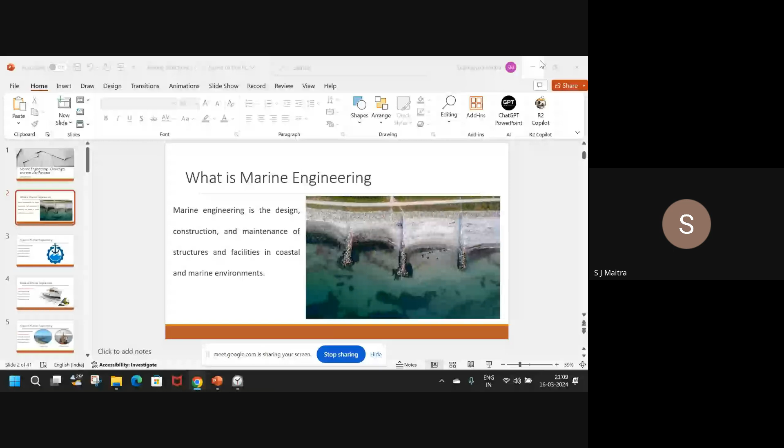Can you make it full screen, Maitra? It is at full screen right now. No, we are seeing it and it is not in slideshow mode. It is in slideshow right now for me. Can you please close it and reopen? Yeah, fine. Just a minute. Is it better now? Perfect. Please proceed. Okay, fine. So I'll start from the beginning.

So the topic of today's discussion is going to be marine engineering challenges and the way forward. I have kept it as introductory as possible. I am told that most of you are not from a marine background, so whatever I'm going to say is going to be very new to you. So we will go to the challenges and way forward, but I have spent a lot of time crafting a PPT that will help you understand and give an introduction to marine engineering as a whole.

Okay. So first of all, let us begin with what is marine engineering. Marine, as the name suggests, is anything related to water. Water, sea, oceans form about 75% of Earth's surface, right? And we have a lot of cargo movement that happens in the oceans and the seas. So the primary objective of marine engineering, be it 2000 years back or 4000 years back, was that cargo had to move from point A to point B.

And for that movement, all the basic infrastructure, be it roads, ports, ships, or coastal structures, had to be made for movement of cargo. So essentially, marine engineering is the design, construction, and maintenance of structures in coastal and marine environments. Whatever the structure, if you are designing, constructing, or maintaining it, there are certain codal provisions and aspects you have to keep in mind, and that entire scope is under marine engineering.

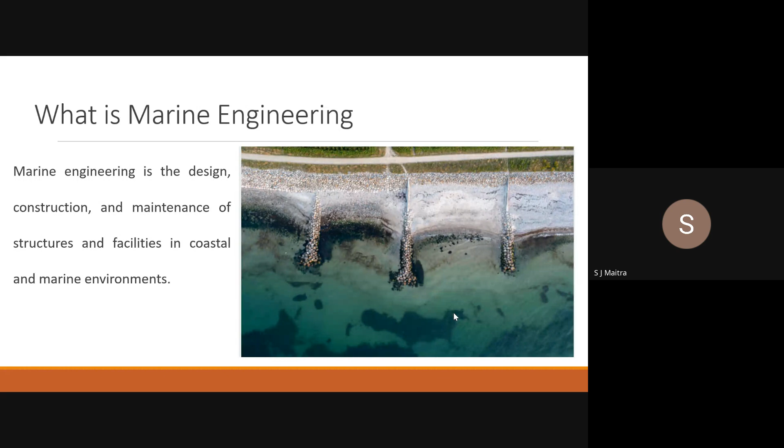All right. So let's move on to the next one. So what is the scope of marine engineering? Marine engineering has many parts. Okay, I have just tried to narrow it down as much as possible.

2000 years back, we were only moving cargo from point A to point B. But in 2024, we have a lot of technologies now. We have come up with many opportunities, many things. So these are the fundamental 5 pillars that marine engineering encompasses, right?

The first is naval architecture and ship design. So essentially, any ship that is made or any ship that is moving, however big it is, however complicated it is, however small and simple it is, needs to come out of a design sheet. Just like how 2D and 3D drawings are made, similarly, for every ship, you will make a design. Okay, so that is your naval architecture and ship design.

Second part is marine structures design. Third is dredging and harbor works. Fourth is marine power generation. Fifth is ship and cargo movement.

Okay. So I had started explaining naval architecture and ship design. As I said, it can be as complicated as an aircraft carrier or as simple as a 1000-ton barge. Every ship will have plan, section, elevation drawings, just like we have in a building or in a bridge, right? So this entire discipline is under naval architecture and ship design.

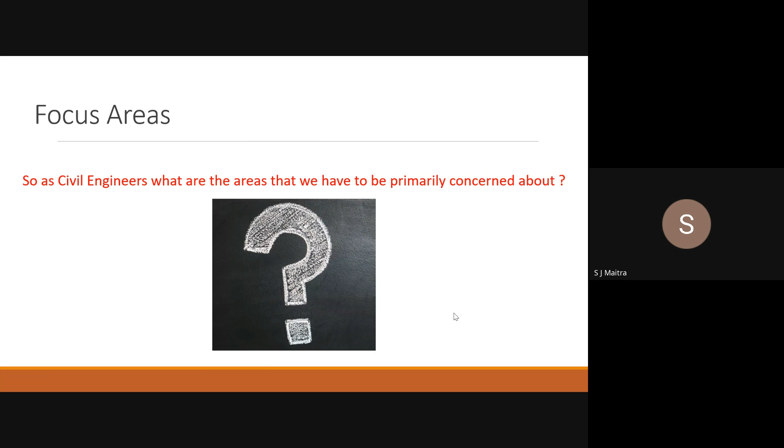Yes, correct. So, okay, now I'll be just moving on. May I know your name, please? Who said the last one? Sir, Govind. Okay, hi Govind. Govind, you're absolutely right about it. Marine structure design is one of the biggest focus areas for civil engineers. Now I'll come into the actual focus areas according to me. So first, as Govind said, marine structure design.

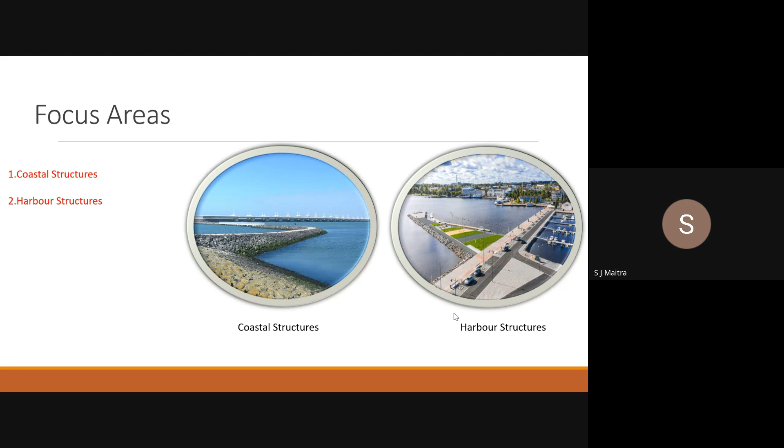If you go back to the slide, you will see marine structure design had 2 parts. One is coastal. Second one was offshore structures. Now for us, as civil engineers, coastal structures are the most important part. They are the bread and butter of every marine civil engineer, right? That's the first. The second is harbor structures. So harbor structures essentially will give you the entire civil infrastructure that is required for ship handling. So that is very, very critical again, right?

These are the 2 parts on which I have basically gone in depth. And other parts are there. As someone said, dredging and harbor works. I think dredging and reclamation was exactly there in that. So that is also very important. And about that also I have a few slides, but the primary focus will be on coastal structures and harbor structures. These are the two most important parts that a civil engineer should know about, right?

So the objective of the presentation is to give you the understanding on the following topics: coastal structures, harbor structures, dredging and reclamation, and a fourth one I have introduced newly, which is not mentioned anywhere, and that is survey and monitoring works. I will be talking about survey and monitoring. There are no specific slides on it. I want to talk to you on survey and monitoring because it is very straightforward, but people make it very, very complicated. First, let us come to our first topic, that is basically coastal structures.

So coastal structures essentially means any structure on the coastline that helps in protecting my shoreline, that is one. And second, it ensures that my harbor area is not having very high waves. When I move forward, you will understand it a bit better. But for the time being, just understand that coastal structures means any structure along the coastline, and my two main objectives are: one, I am protecting my shoreline, there should not be any coastal or shoreline erosion. Second, I am making the sea calm as ships come towards the coast.

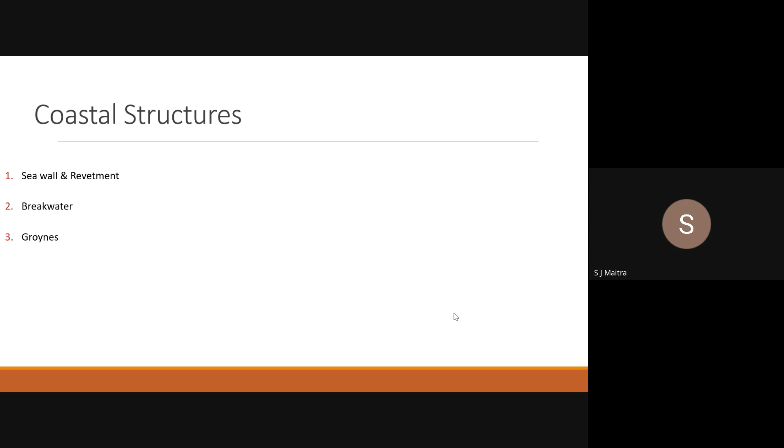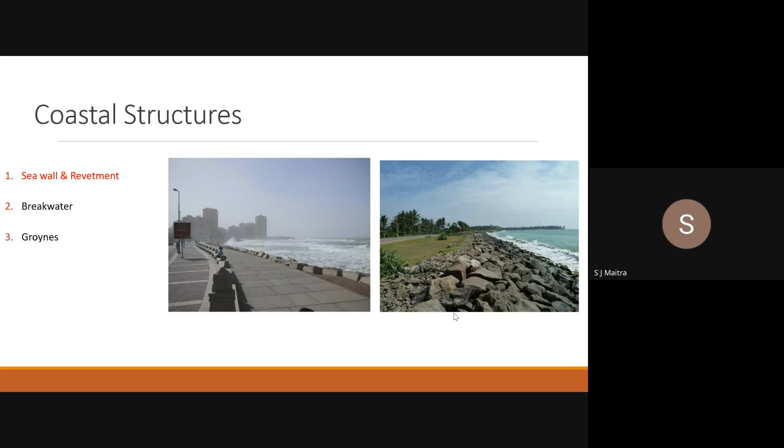There are many types of coastal structures, but three fundamental ones are seawall and revetment, second is breakwater, third is groynes. Now, seawall and revetment. It is very straightforward. The meaning of seawall is you're creating a wall along your entire coastline to protect it from any kind of erosion and any kind of wave attack. Once you make this structure, you can build roads on it, you can reclaim that soil, you can do anything you want, but this is the fundamental of seawall and revetment.

Now, in addition to that, I have also provided here a typical cross section of seawall and revetment. Can you see my mouse pointer by any chance? Yes, visible. Yes, right. I think the laser pointer is better.

If you see, this part is basically my revetment or seawall, and this is my land area. I have to protect this land area from wave attack. So I am creating a barrier which is multi-layered. First, I will take an excavator and excavate it in a slope, 1 in 2 slope, 1 in 3 slope, whatever slope. Then I will place a geotextile to retain that soil.

Next, I will put a small graded stone layer, which is basically the under layer. The gradation of this layer is going to be lesser. It can be 10 to 20 mm or say 50 to 60 kg rock. I will be placing it over the geotextile so that the geotextile does not get damaged. On top of this layer, I'll be putting large rocks. This can be 3 to 5 ton rock, or 20 to 30 ton rock, based on my wave attack.

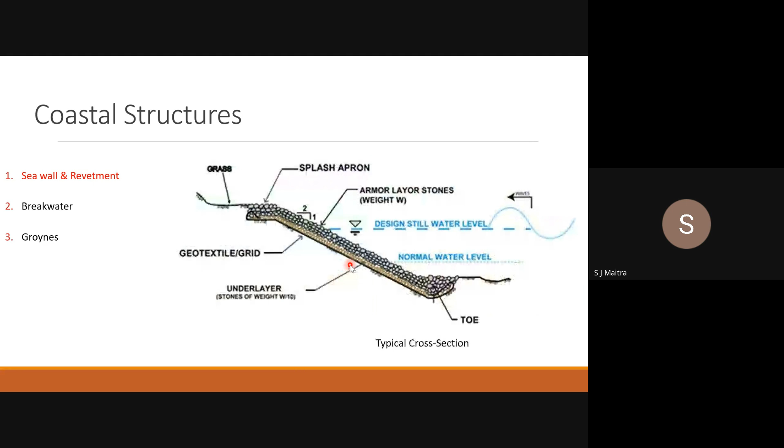So this will ensure that the shoreline on this side is not eroded and not taken away by the sea. This is my basic fundamental of a seawall or revetment. It will protect my shoreline from any kind of attack. So this is a typical cross section. In the previous slide, I showed you 2 pictures, and if you see, there are 2 pictures here.

Well, just a minute, I have to edit my PPT here. This image is overlapping. Right.

So now, again, an audience quiz. Can somebody guess what location this is? Mumbai. Yes, but specifically where? Marina Bay. Marine Drive. Yes, correct. So if you go to Marine Drive and walk, this is the Arabian Sea bay.

This part is the promenade on which there is land, and they have created a revetment here. You will see large rocks here at a slope of 1 in 2 or 1 in 3. And they have protected it with concrete blocks, which are tetrapods, about which I will tell you in the later slides.

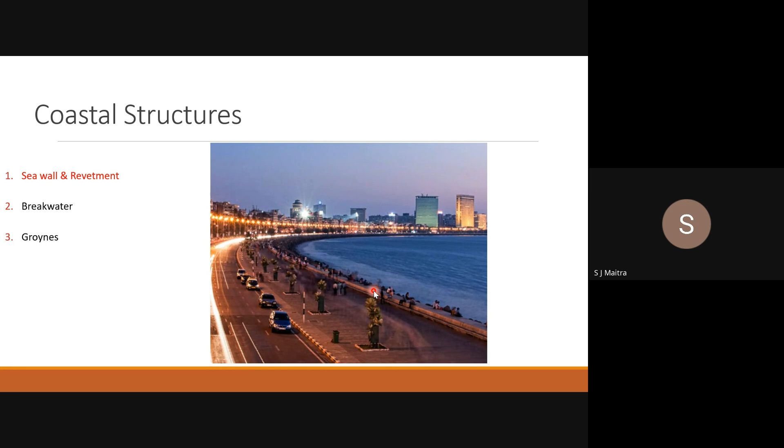And on top there will be a flat surface. So if I take a cross section of this and show you, it will look exactly something like this, right? So this is the primary objective of a seawall. Now, if I don't have this, then the sea will come in, and if I build any road here, it will be taken away by the sea. And that is the objective, and that is the construction of a seawall and revetment, right?

Now, this is another example, same in Mumbai, but this is an under-construction project, and I think they commissioned it last week or something. This is basically the Mumbai Coastal Road project, right? So if you see, same logic. You have very big rocks that are placed. These are 1 to 3 ton rocks. Below that, there is an underlayer, which will be somewhere between, I think, 10 to 20 kg rocks.

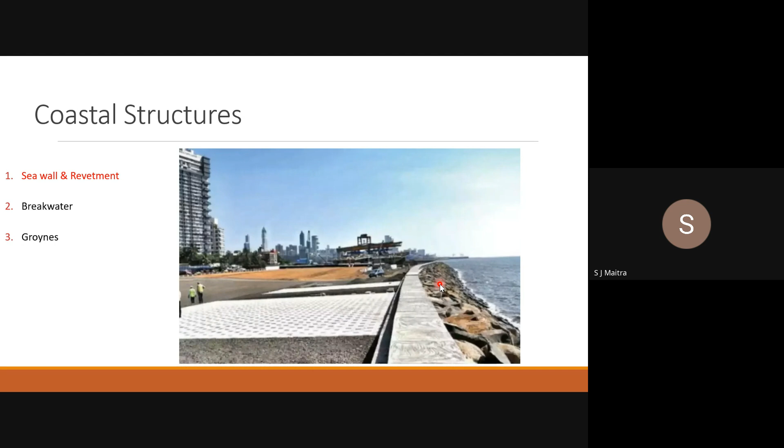And inside that, there will be a core material, or reclamation fill, which is nothing but very, very fine sand. And below that, I'm having a geotextile or something. And on this side, I have my land. So the objective is, on this land, I'm building roads, and the sea will take away those roads if I don't protect it. So this is the objective, and this is the construction, typical cross section of a seawall or revetment.

Now come to the second part, and this is a very interesting part. This is a breakwater. Essentially, a breakwater is the same logic as a revetment, but a revetment is only one-sided big rock. A breakwater has slopes on both sides, right? The fundamental idea of a breakwater is for any ship to come inside a port and for us to unload the cargo, because the ship is not coming empty. So for me to unload the cargo, the ship has to be stable. It cannot move left, right, up, down.

If you go to any beach, you will see that waves are constantly coming and hitting, right? So if there is constant wave action, the ship cannot be stable. It will constantly move left and right, up and down. So for a ship to come inside and be stable, I have to stop that wave action, and for that I generally use breakwaters. The waves will crash against this line. This area will be calm, and this area will have a lot of turbulence. So if I build a terminal here, I can happily load and unload my ship cargo. That is the fundamental objective of a breakwater.

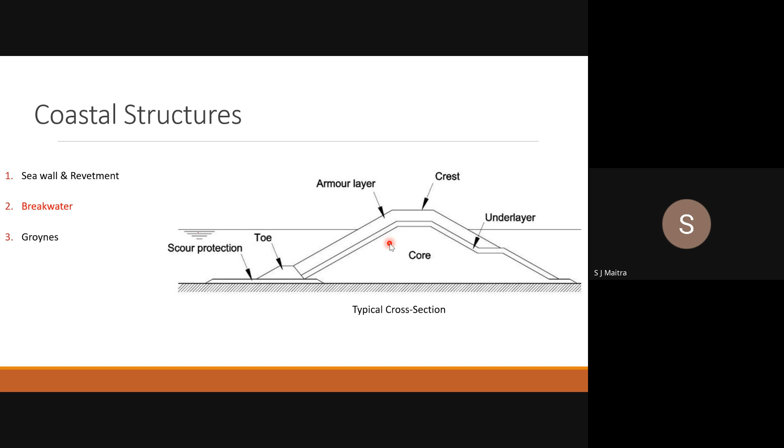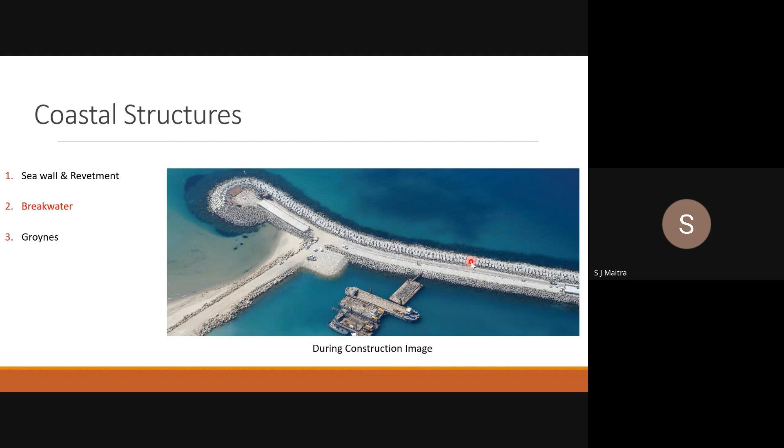So now, this is an interesting part. If you see here at the armor block, they have used a concrete layer, right? If I go back, here they have used rocks. So this depends on site feasibility or designer's choice, but if it is concrete armors, you have some standard armor blocks. These are various standard armor blocks, out of which I have used tetrapod. If you go to Marine Drive, you will see tetrapods. There is something called acropod. If you go to Dabhol breakwater in Maharashtra, you will find acropods.

Sorry? Hello? Sir, could you please explain the difference between tetrapod and rock? Actually, I have seen tetrapods in various places, Ernakulam, Trivandrum, and Kanyakumari also. I want to know the difference between tetrapod and rocks. Okay. See, it is a detailed design answer. I'll give it to you, but try to understand it the best you can, and if you have further doubts, you can call me personally and I can explain.

But the fundamental logic is that a tetrapod is cast in a particular shape. When you are placing a tetrapod beside a tetrapod, that tetrapod's leg will fit here. So you will have 5, 6, 7,000 tetrapods in one line, with proper interlocking and a lot of surface friction. Because of that, the resistance of a concrete armor block, especially tetrapod or acropod, is very high compared to rock. So if you require a 2-ton tetrapod, with armor rock you will be requiring at least probably 6 or 7 tons.

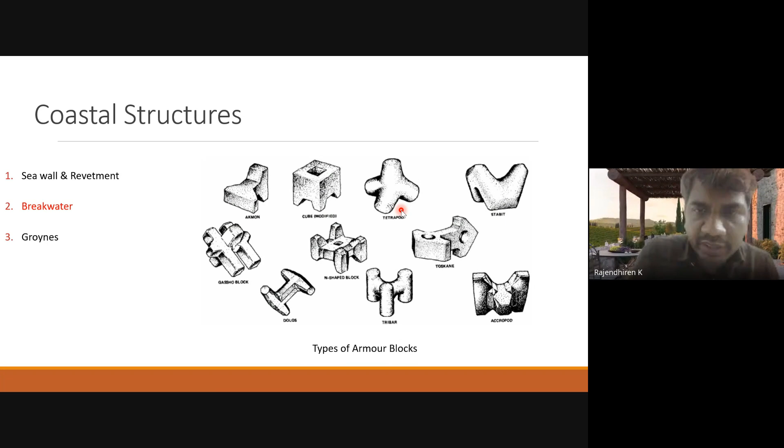Okay. Bhavani, thank you. Very good question. Thanks. Okay. Any other questions or anything?

You can go ahead. You can go ahead. Okay.

I'll just summarize, Bhavani, what I said, because I know I said a lot of things. The primary focus is that tetrapods or any concrete armor block will interlock very easily. However, normal rocks will not interlock with each other very easily. So you need smaller size concrete armor blocks and you need much larger size armor rocks. So that is the reason you go with concrete armor over rock armor. Okay.

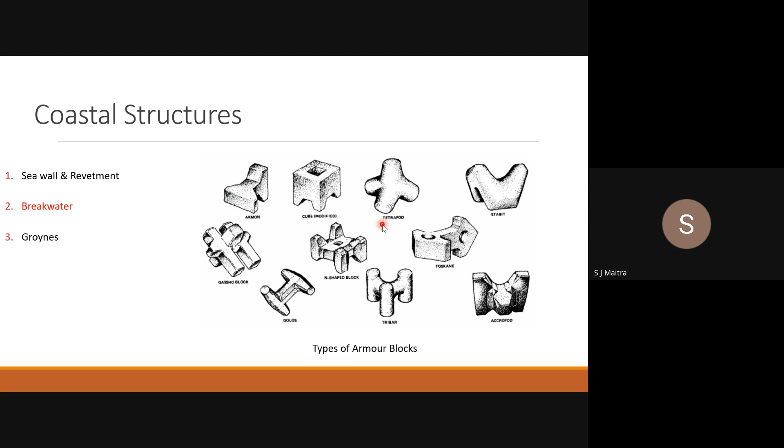So, okay. The next part is groynes. Groynes are very interesting. Groynes are nothing but breakwaters that are constructed at 90 degrees to the shoreline. Generally groynes don't have any commercial or industrial reason. Breakwaters I will construct for a port so that ships can be stable. Sea walls and revetments I will construct so that I can protect my roads against erosion. Groynes are primarily built for environmental reasons.

So whenever you make any kind of coastal structure along a coastline, there is the sea movement, which is called littoral drift. Basically, littoral drift is nothing but the movement of waves along this line. Because of this movement, a lot of sediment transport happens, meaning it will transport sand from point A to point B. That is littoral drift.

Because of that, my beaches environmentally become a very big nightmare for me, because slowly and steadily my shoreline starts going back, and there is no natural nourishment of the beach happening from the sea. So to avoid that, we create these structures called groynes.

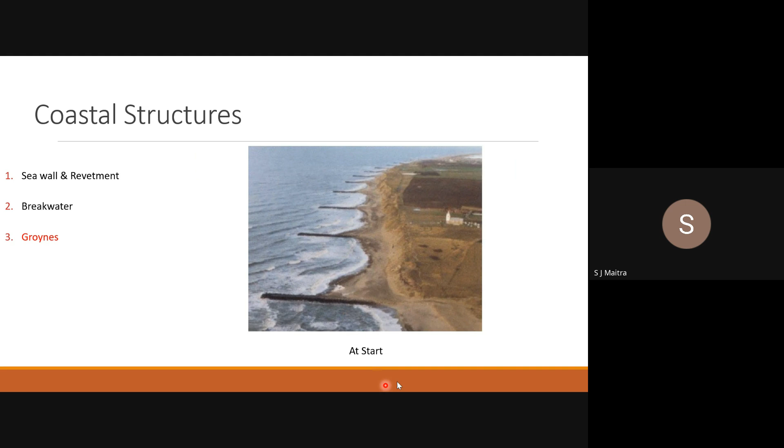In the next image, this is much clearer. If you see, 1, 2, 3, 4, and 5 groynes were built, and initially it would have looked something like this. Then over the years, it will look something like this. The entire groyne gets covered with sediment, and the groyne itself goes below the sediment. Because of that, you will have a very wonderful beach and shoreline.

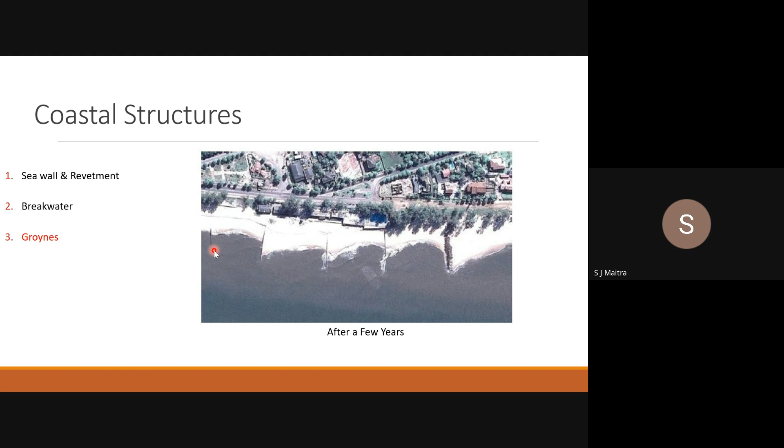Now, this takes time, but this is a permanent solution, and it is a very common solution used across the world. So groynes are one of the most important coastal structures from an environmental perspective, right? Now come to the second part. I have finished with coastal structures.

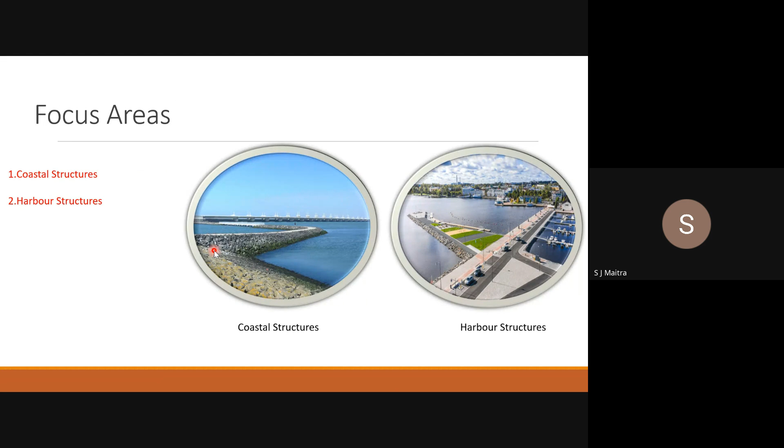The second part is harbor structures. I'll just go back and tell you where you are in the PPT. I had told you about coastal structures and harbor structures. I have finished coastal structures. Now we will be moving on to harbor structures. Essentially, any structure that is built at the junction of sea and land is a harbor structure.

So you will see that a breakwater is also part of a harbor structure. The small boat parking area or small boat harbor is also part of a harbor structure. Jetties are part of harbor structures. The anchorage area is part of harbor structure. Everything that you see here is part of a harbor structure, right?

Now, I'll tell you what these are one by one, I'll just give you the definitions. All you need to remember is that a harbor has many moving parts that are simultaneously working to ensure that a ship will come from this part here, dock here, and then there will be cargo movement, loading and unloading, right?

Now, a few fundamental definitions here. Number one is a breakwater. The breakwater will ensure that no wave action is coming here, as I had told you.

That is first. Second is a jetty. A jetty is a 90-degree projection that is created outside. Ships can come and connect themselves or dock themselves along the jetty, right? The third is an anchorage area. So anchorage area is basically where the ships come and where they are stable, where they have left their anchor and they have been attached with the shoreline, correct?

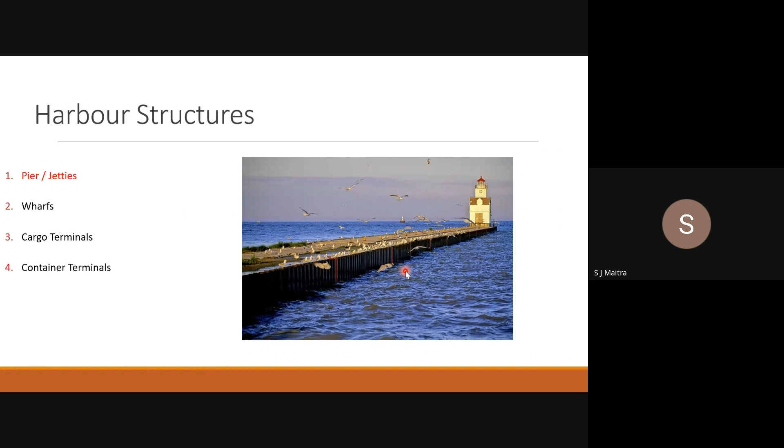So anything that is a 90-degree projection is a pier or a jetty. Anything that is at 0 degrees is a wharf. Now, a wharf which will handle cargo is a cargo terminal wharf.

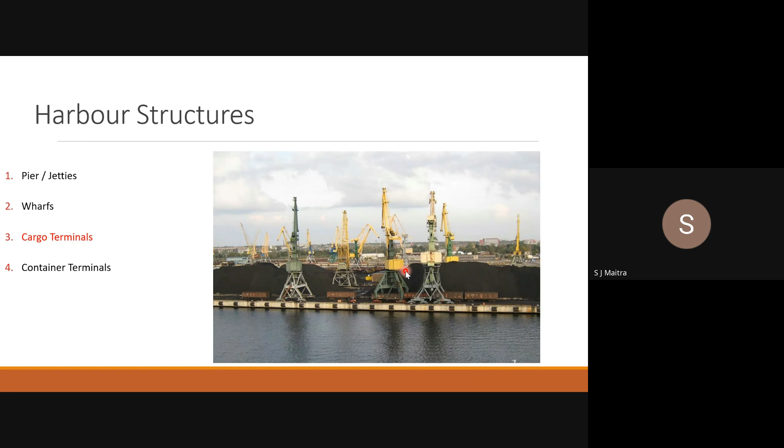A wharf that will handle container terminal and for placing container stack yards is a container terminal wharf. Okay, so these are the four primary categories.

Next, now coming to the additional information, we are nearly at the end of our presentation. So the first thing is dredging and reclamation. As I said in the beginning about which parts are very critical and important: after coastal and harbor structures, one of the biggest importance is for dredging and reclamation. So dredging is basically underwater excavation. Anytime anybody asks you what is dredging, even if you dive inside, take a stick and start digging below water level, it is dredging. So any kind of excavation happening below water level is dredging.

Now there are two ways to handle the material that is coming out of the seabed. One, I go to a distant area and I just dump it because I don't need it. Or second, I can take that material and dump it in a way to create an artificial island. That is reclamation. Okay. So the first thing is dredging from a civil engineer's perspective. You have to understand that dredging involves underwater sediments. It is essentially important to create waterways for ships.

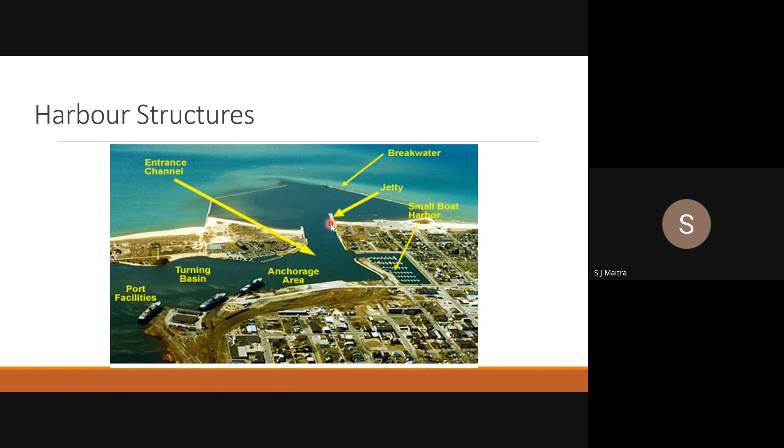So for me to ensure that a ship can come from the deep sea inside and anchor here, I have to ensure that this area is excavated below the water level to provide my ship with access. And that is my fundamental requirement of dredging. Now there are 3 types of dredging. One is known as capital dredging, second is maintenance dredging, third is dredging for reclamation. Capital dredging is when I do not have access depth, so I am digging more and more below water level to get to a desired depth so that my ships can come in. Essentially digging underwater till I get depth for which ships can pass.

Second, after I have done that, every year there will be monsoon and sedimentation. So I have to ensure that my depth is maintained at that level, so every year I have to do dredging. That is called maintenance dredging. Number 3 is reclamation dredging, which is basically I take material from one part of the seabed, bring it to the place where I want to create a new island or new land, and dump it there to get new land. So these are the 3 types of dredging.

Now, in addition to this, dredging happens primarily with the help of what we call dredgers. Dredgers are nothing but specialized ships that have the ability to cut the underwater seabed, suck that material from there and push it to a different location. So I have included 2 different types of dredgers. These are essentially ships which are modified.

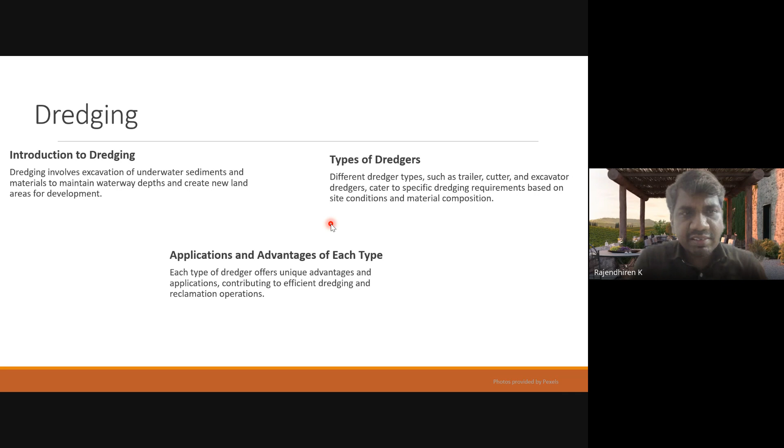Maitra, actually, we can see only the dredging slide. I'm at dredging only. I'll be moving on, just one minute. Okay. Right. So sorry, I lost my flow.

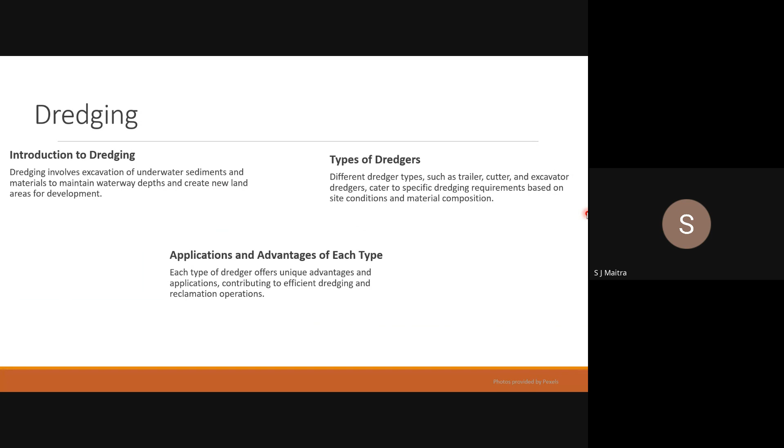There are also various other types of dredgers. One important dredger is something called a trailer dredger, which I have not shown here because it is not very commonly used in India. But cutter dredgers and excavator dredgers, you will come across much more. Right? Now come to reclamation.

So I think on reclamation, there is not much to be said. If I have to go in depth here, it will become very boring, and it will be a lecture on geotechnical engineering. I don't want to do that. So the basic logic is, as I was saying, dredging has three parts: capital, maintenance, and reclamation. So I have dredgers that will pump material out onto a particular area, and I will create an artificial island, right? So that is essentially how reclamation works.

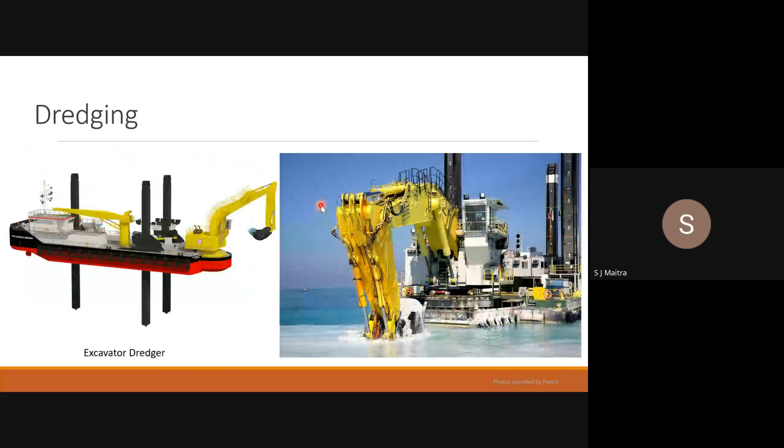Now, instead of trailer dredgers, if you have a cutter dredger, it will keep on dredging, and wherever this pipe is ending, the material is being pumped out. So if I take that side of the pipe and push it here, then it will constantly keep on reclaiming the soil.

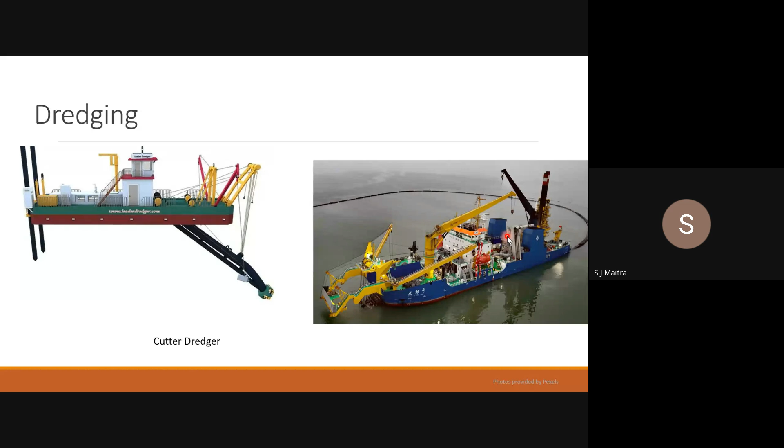So the most effective way of reclamation is using cutter dredgers, but cutter dredgers have one drawback: they cannot work in deep sea, or in areas prone to wave action. In those locations, you either need to go with an excavator dredger or a trailer dredger. That is why many times you see trailer dredgers used for reclamation works, right? So this is all about dredging and reclamation. Please ask me more questions on it, because I have just given you a very brief understanding of dredging and reclamation. And the next is the challenges, right?

So fundamentally, there are many challenges in coastal engineering. The biggest are erosion and sedimentation management. The most critical aspect of coastal engineering is that there is a lot of erosion and a lot of sedimentation that happens. So if you leave the sea as it is, and leave the shoreline as it is, the sea will keep on attacking and it will keep on taking away the material.

So this is one of the biggest problems that you will face in erosion, in coastal engineering, because the moment you create a structure, the sea wants to break that structure and take it back to the sea. So protection against erosion is very important.

Sedimentation management essentially is, the moment I create a harbor, and if I excavate it till say -16 or -18, the sea will come, it will keep on doing sediment transport, and it will keep on filling that area till its original level. So you have to keep on excavating, keep on dredging to maintain the levels at that location, right?

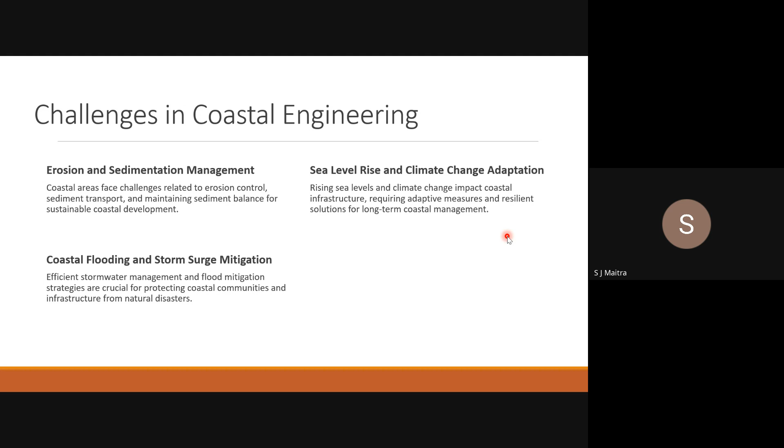And the second part is wind. During cyclones, winds of 250 or 300 kilometers per hour will be constantly hitting your structure for a period of 6 or 7 hours. Add the fact that this wind is blowing over a very rough sea, so there is going to be immense wave action. So designing your structure for this and ensuring that it is resistant to this is very, very critical and very important, right?

It is not like on land, where a normal crack happens and we can say, okay, fine, we'll apply something, or we will completely ignore it. At sea, the marine environment is very, very brutal. So any small crack, any small deterioration, any small rusting needs to be immediately attended to. There is no exception to it. There is no two ways about it, right?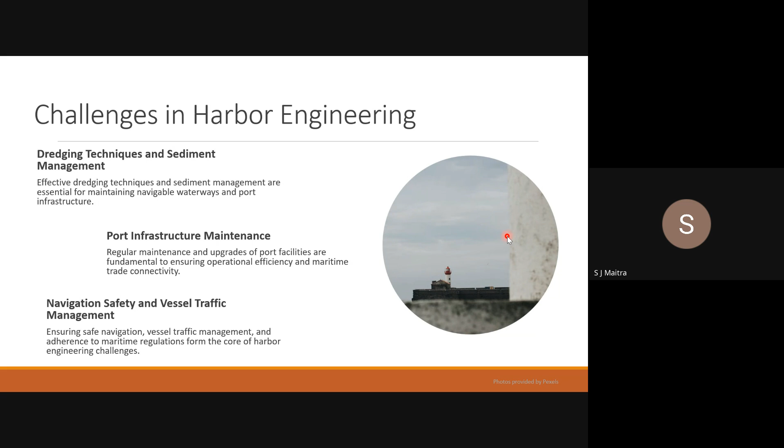So it has given us much better understanding of seabed, much better understanding of traffic management, much better understanding of coastal structures, how they behave. As computers are getting more and more powerful, we are able to simulate the actual actions at sea using a computer, which was not possible before. Even 20 years back, it was not possible. Right now, we are getting these things. So it's a very new field, and it's very, very interesting.

I had planned to show a case study using Google Earth. So should I go ahead with that, or should I stop? Okay, Maitra, no, you just hold on the case study for a few minutes.